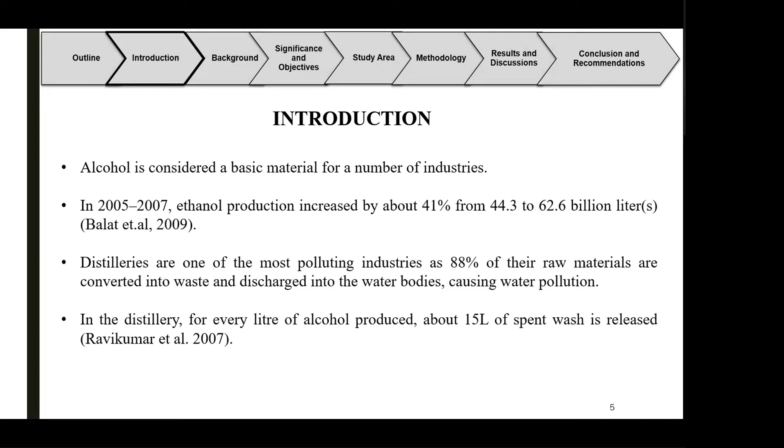Distilleries are considered one of the most polluting industries, as 88% of the raw materials are converted into waste and discharged into the water bodies, causing water pollution. In the distillery, for every liter of alcohol produced, about 15 liters of spent wash is released. So you can imagine how much wastewater is being produced.

Just a little background: currently, alcohol production is based on the use of non-waste agriculture substrates such as cereals, potato starch, etc. On a global scale, about 47% of ethanol is produced from sugary raw materials.

There are 4 stages of alcohol production in distilleries. The first is feed, where the ethanol production raw materials containing nitrogen and phosphate supplements are used. Then comes fermentation, in which yeast is used, for example Saccharomyces, which converts the carbohydrates into alcohol and then settles as sludge at the end of the process. The mass after fermentation contains 8 to 10% ethanol.

Then in the distillation column, the alcohol is separated as the top product, and the bottom product is a brownish liquid known as distillery stillage. Then comes finally the packaging and deliveries to the clients. Currently, in some countries, byproducts from the distillery industry are used for direct soil fertilization due to their high content in nitrogen, phosphorus, and organics.

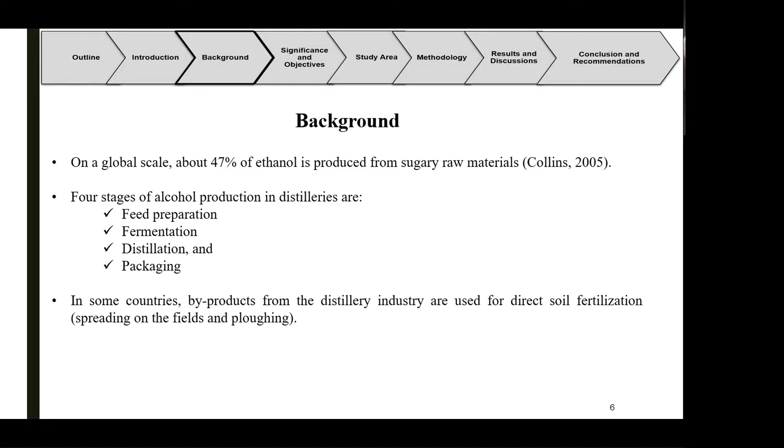Is it moving? I think it's stuck. Yeah, we see the same slide.

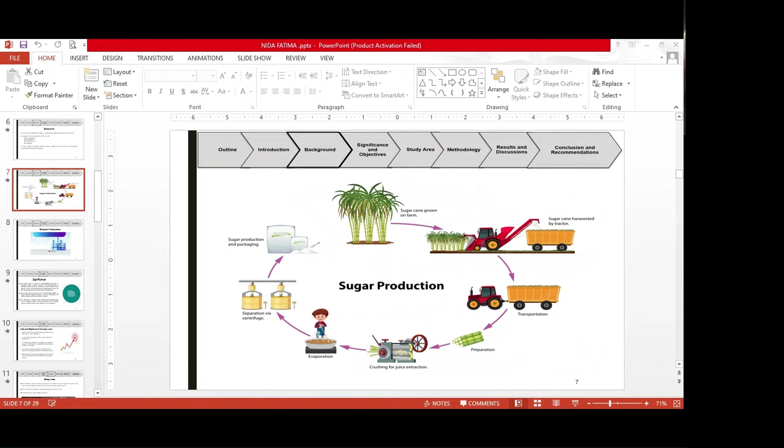Okay, sugar production. This is the general view of sugar production, how sugar is produced. Sugar cane from the field is harvested and transported to the sugar mill, where it is crushed for sugar cane juice extraction, evaporated in a large pan, and then separated via centrifugal machines. The final product is then packaged and delivered.

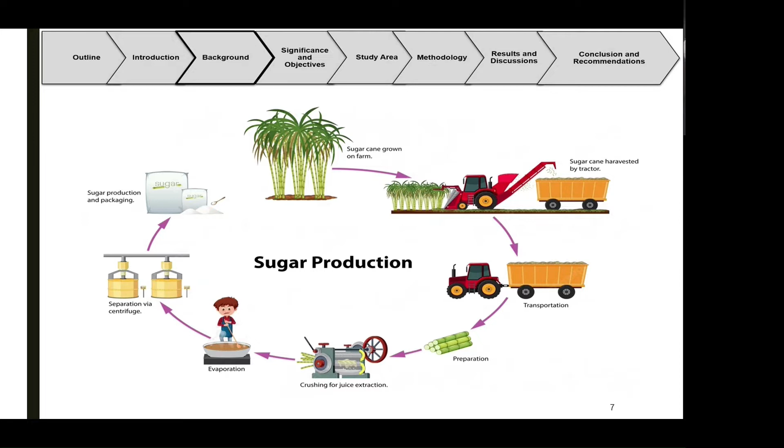Now let's see in the short video how ethanol is being produced in the current study area.

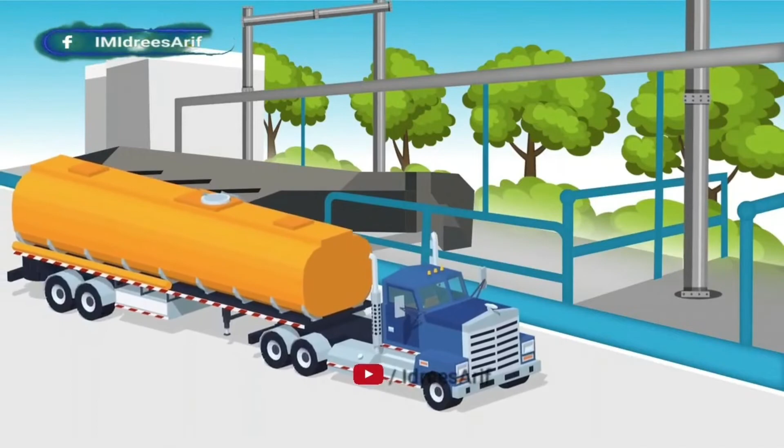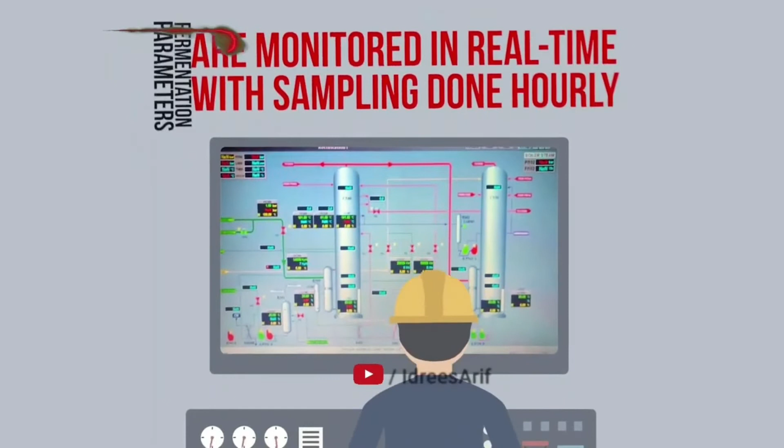We have always made quality our number one priority. We have in-house labs at all of our plants that meet international safety and quality standards. Our quality control process begins at the raw materials stage, where we have fully covered molasses tanks for our in-house feedstock, which happens to be the largest amount of captive distillery feedstock in Pakistan. When we buy feedstock externally, we test prior to purchase, individually monitor each shipment, and have an imported seal technology to prevent tampering. During the fermentation process, fermentation parameters are monitored in real time with sampling done hourly. We also import our yeast from the United States to ensure high yields and purity of our product.

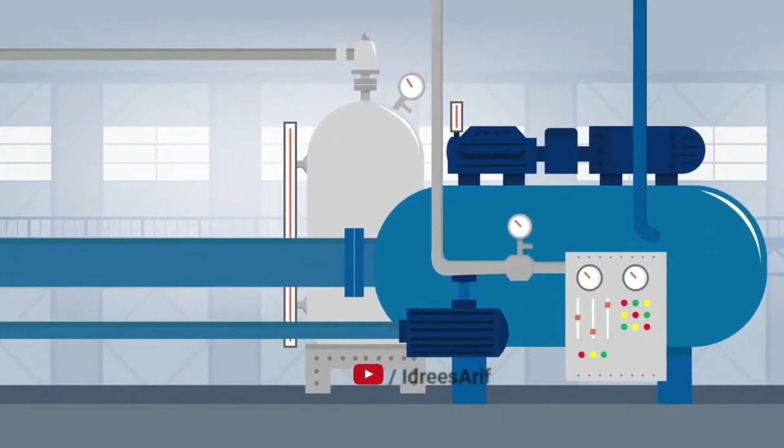Once the product enters the distillation process, we collect samples every 30 minutes to ensure moisture percentages are tightly controlled and impurities are kept to a bare minimum. The odor and appearance of the ethanol is also closely monitored. After the distillation process, the ethanol reaches an intermediate tank where it is immediately sampled and tested to make sure it meets our strict quality standards.

Before the intermediate tank is emptied, the ethanol is tested again. Once in general storage, the ethanol is sampled and tested daily to ensure it maintains the properties and quality it had upon entering the storage tanks. Finally, prior to loading from our distillery's storage tanks, the ethanol being sold is sampled and tested again to ensure there is no variation in quality parameters.

Okay, now you have already seen what happens in this industry. It's a general process as occurred in every distillery and sugar mill. Now let's move on towards the significance of the study that I have done.

Then you can see that from air pollution, asthma and other diseases are attacking people living near the vicinity of these areas. Also, increased transportation is causing a major threat to wildlife in the area, and wildlife is suffering from habitat loss due to frequent disappearing of forests only for the sake of industrialization.

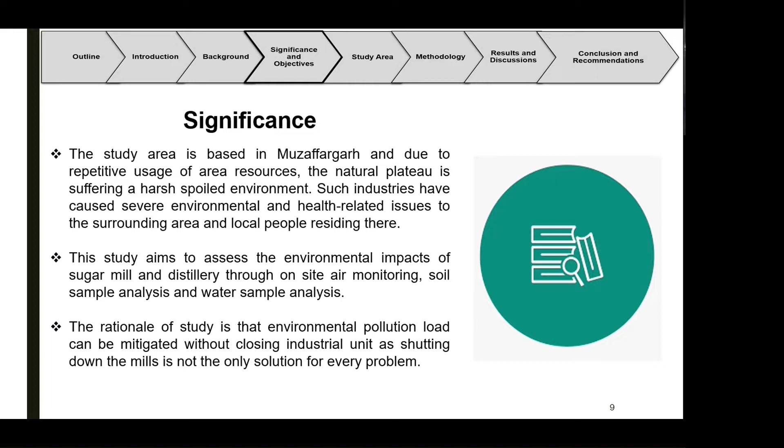So this study aims to assess the environmental impacts of such industries through air monitoring on-site, soil sample analysis, and water sample analysis. The rationale of the study is that the environmental pollution load can be mitigated without closing industrial units, as shutting down the mills is not the only solution for every problem.

These were the aims and objectives of the study: monitoring various environmental quality parameters of air, water, and soil; to inspect the wastewater pollution load in sugar mills; to evaluate the pollutant concentration in air; assessing environmental impacts of sugar mills; and then suggesting feasible and environmentally friendly actions to resolve and mitigate adverse health and environmental impacts.

This is the study area. This industry comprises three sugar mills, two ethanol distilleries, and a carbon dioxide plant. They have two main labs staffed by multiple professional chemists and biologists. The distillation columns are made from high-grade stainless steel, which prevents corrosion and thereby protects the ethanol from impurities.

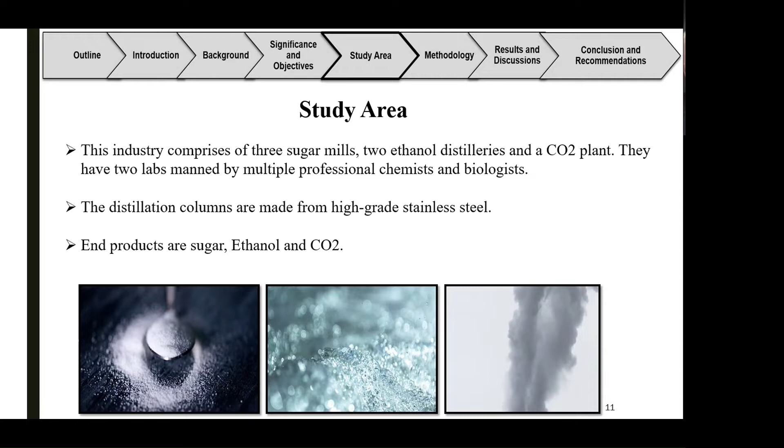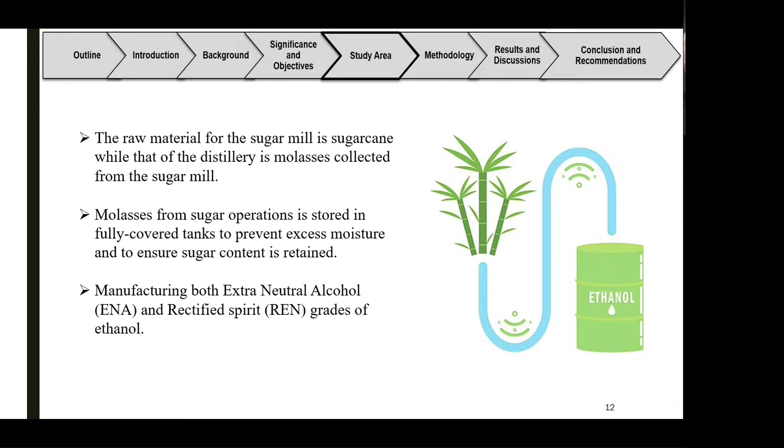End products produced were sugar, ethanol, and carbon dioxide. The raw material for the sugar mill was sugarcane, while that for the distillery industry was molasses collected from the respective sugar mill. Molasses from sugar operations is stored in fully covered tanks to prevent excess moisture loss and to ensure sugar content is retained. This industry manufactures both extra neutral alcohol (ENA) and rectified spirit (REN) grades of ethanol.

So this is the aerial view of the study area, where a road named Shah Jamal was the main road touching the project site location. There was a stream running nearby used for draining effluents from the mill, and about 500 meters away there was a residential area.

This was the pond or collective tank you can see here, that was used to discharge the wastewater or to collect the wastewater in there, and from there the processed water was discharged into the nearby stream slowly so that the pollution load in the water body having that wastewater could be controlled at a time.

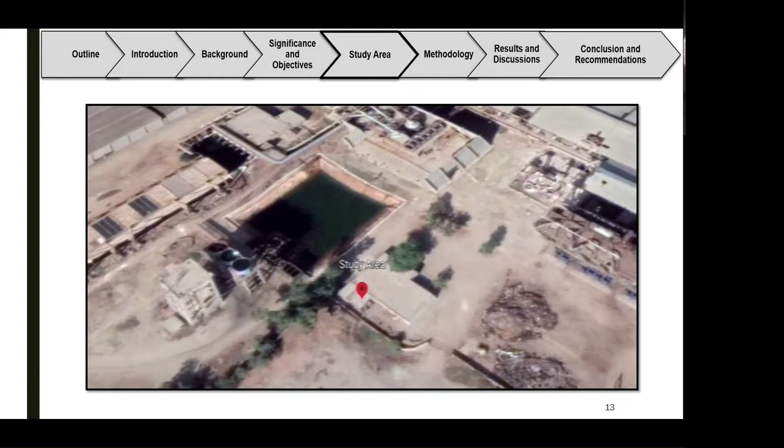Let's see what methodologies were adopted during the whole assessment. This is a general or universal method that can be used for conducting environmental monitoring and impact assessment of any industry in the world. First of all, secondary data was collected through a complete literature survey and comprehensive information regarding the sugar and distillery industry and its adverse impacts on the surrounding environment. The baseline study of the research area was carried out and impacts were noted down as well.

Then primary data was collected through a reconnaissance survey. A thorough site visit was conducted in which various samples were gathered and relevant checklists were filed respectively. In the present study, we researched essential environmental quality parameters like water, soil, air, and noise. Noise and air pollution were monitored on-site through various instruments, while water and soil samples were taken and later analyzed in the lab.

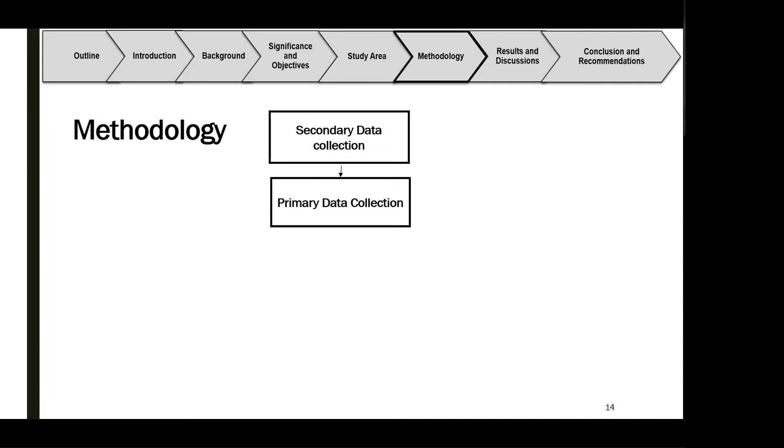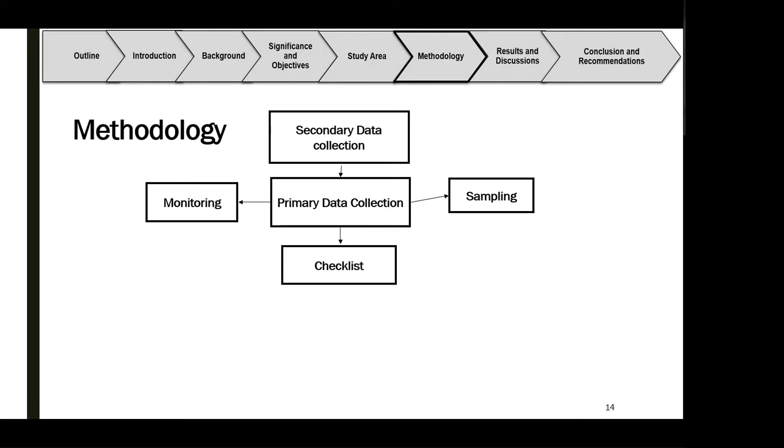In primary data collection, we have sampling, checklists, and monitoring. In the checklist section, for assessing the social impact of industry, general public interviews were recorded on a form, and a checklist was filed to estimate whether local people are accepting the industrial working areas or not. In the sampling section, we collected samples of wastewater, groundwater, and soil.

All samples were collected adopting proper standard methods for examination of water and wastewater by APHA USA. Samples from the canal were collected where water was well mixed, homogenized and flowing, whereas grab sampling was used for process and wastewater sampling. For groundwater sampling, we collected samples at a depth of 200 feet at the project site.

Values for TDS, chloride, pH, sodium, turbidity and other elements shown in the slide were analyzed. Similarly, other parameters such as pH, sulfate, chloride, fluoride, etc. were analyzed by taking soil samples from the study area.

For the monitoring section, we have noise monitoring and air monitoring. Ambient atmospheric quality parameters like nitrogen oxides, carbon monoxide, sulfur dioxide, carbon dioxide, ozone, and PM10 were monitored at various points, as shown in the results section later. Noise level monitoring was done in decibels at 3 points: start, mid, and end of the project site.

On-site monitoring operators and sampling materials were required for the site survey and monitoring. A HAZ scanner was used for measuring atmospheric gases, while a digital sound level meter was used for measuring noise level at the project site. For water and soil samples, various laboratory instruments were used, such as titration assembly, atomic absorption spectrophotometer, and flame photometer, for analyzing various elements in the soil and water body. For reference methods of each parameter, you can check my thesis in detail. Finally, the data was analyzed and results were interpreted accordingly.

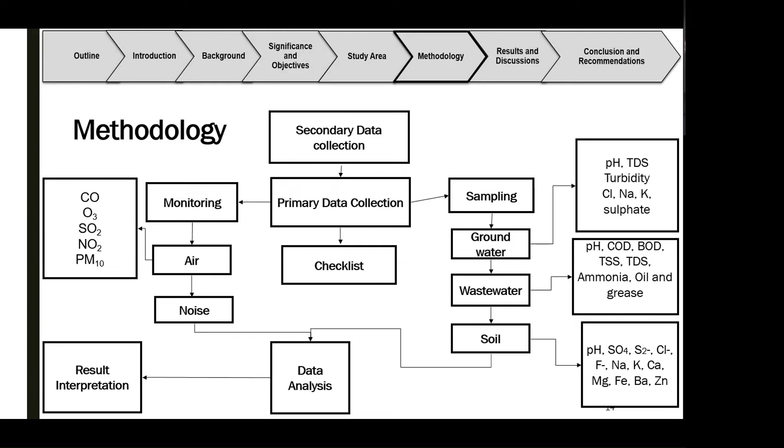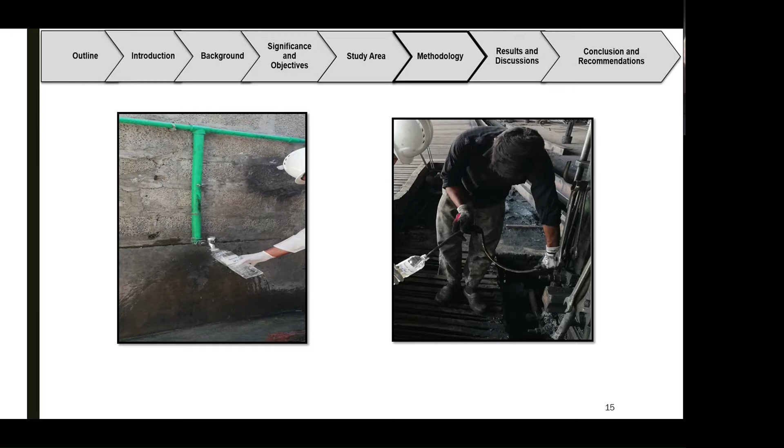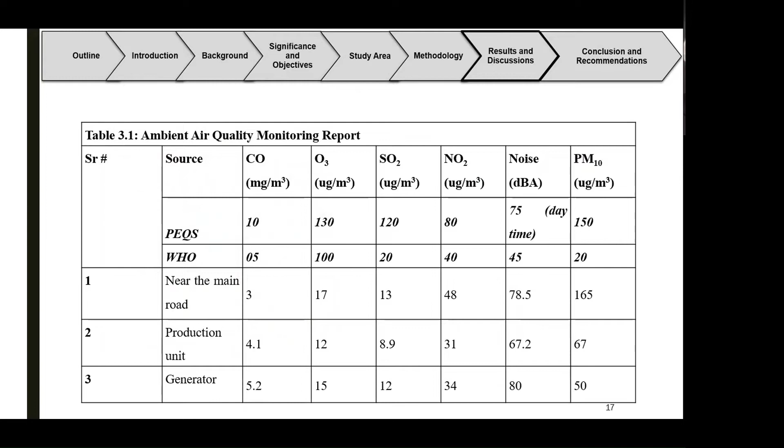This table shows the concentration of various air pollutants monitored at the project site. This graph compares the concentrations of air pollutants at 3 different points of the project site. It shows that pollutant concentration is higher at the production unit, while interchangeably lower at the generator site and near the main road, except for nitrogen dioxide.

It also shows that concentrations of carbon monoxide, ozone, sulfur dioxide, and nitrogen dioxide are below PEQs, while noise and PM10 are higher than PEQs near the main road and generator site. PEQ stands for Pakistan Environmental Quality Standards, also called NEQS, National Environmental Quality Standards. These are standards set by the government for industries regarding allowed air pollutant or noise levels for a specific period of time.

However, in the case of WHO, World Health Organization standards, levels of sulfur dioxide and ozone are below standard, but concentrations are higher for carbon monoxide, nitrogen dioxide, noise, and PM10. If you're not familiar with PM10, PM stands for particulate matter—hazardous, inhalable, inorganic or organic particles that remain suspended in the atmosphere and cause significant environmental issues. They can be of different sizes, but the most hazardous are thought to be PM2.5 and PM10, where 10 means size equal to or smaller than 10 micrometers.

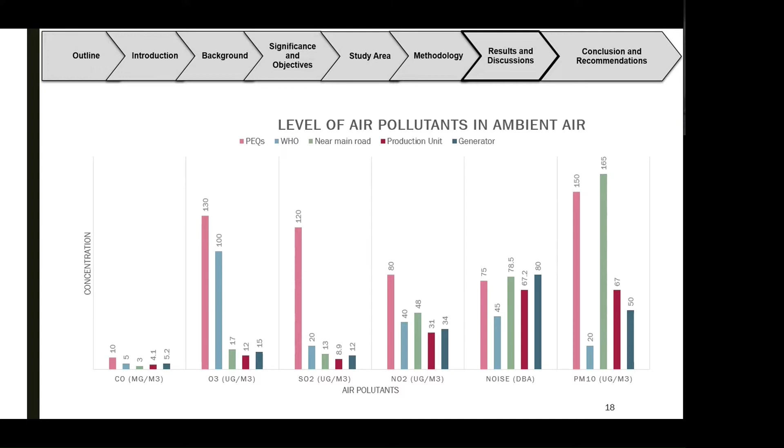This table shows the chemical analysis report of a soil sample. Various mineral concentrations were analyzed and arranged in tabular form, and the figure shows the graphical representation of the soil sample composition with different minerals and their concentrations. Among anions, sulfate and chloride have the highest concentration, while among cations, calcium and sodium are rich in concentration. The remaining mineral components were found in the least amount, and none of the heavy metals were detected in high concentration.

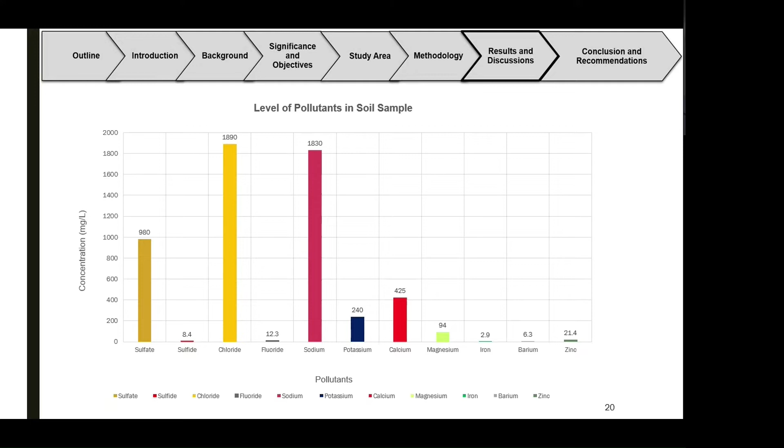This table shows the chemical analysis report of groundwater at a depth of 200 feet, and the figure compares the different concentrations of groundwater pollutants. It shows that concentrations of pH, TDS, chloride, and sodium are the highest among other pollutants and also exceed the set limits of PEQs or WHO standards.

Dissolved salts are the main reason behind high TDS content, total dissolved solids. However, turbidity is within the allowable limit of PEQs. Turbidity is considered the second key parameter for testing whether water is polluted or not.

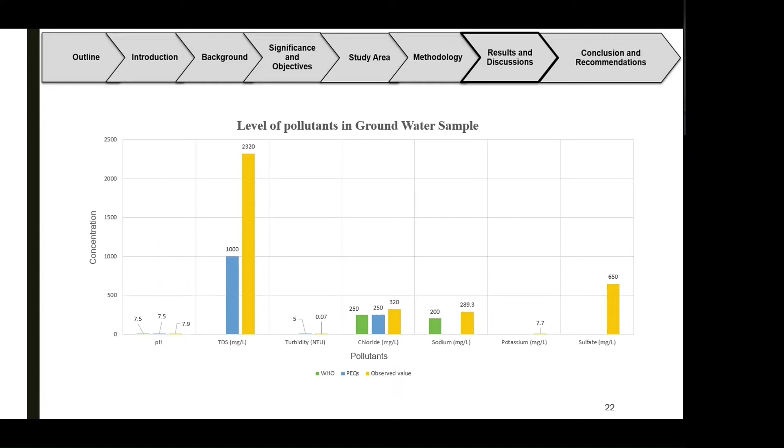Turbid water is not necessarily hazardous. Some minor treatment technology may improve water quality, including sedimentation or coagulation, flocculation techniques, etc. Moreover, potassium and sulfate were also detected during the analysis.

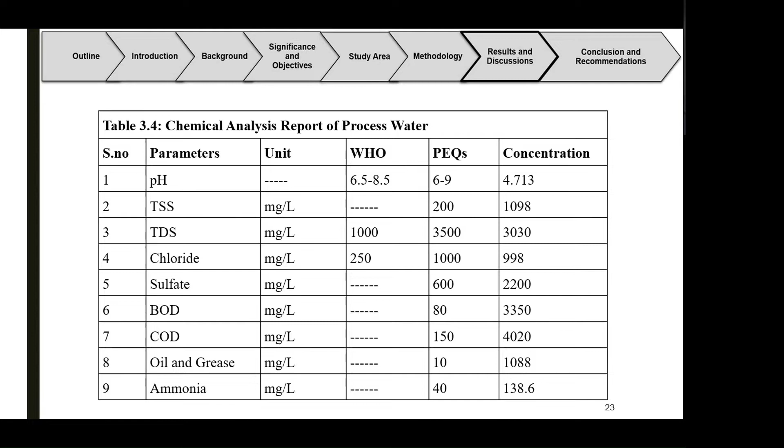Now comes our last chemical analysis report, that of processed water, and its figure shows the comparison among different concentrations of processed water pollutants at the project site. It describes that the concentration of every variable observed in the processed water is above the permissible limit.

As it is processed water or wastewater, you can see that while chloride concentration is above WHO standards, it is just touching the borderline of PEQs standards.

For people who don't know the terms COD and BOD, COD stands for chemical oxygen demand, while BOD stands for biological oxygen demand. Both mean the measure of the amount of oxygen required to oxidize a particular amount of organic matter in wastewater, using a strong oxidizing agent for COD.

But in BOD, we use aerobic microorganisms during the course of 5 days. So in COD we use a chemical agent, while in BOD we use microorganisms.

The graphical representation in the figure shows that COD value is greater than BOD in the processed water. This is because COD is the most accurate method for measuring the concentration of organic matter in wastewater, as a strong oxidizing agent is used. That's why you will observe COD values will always be higher than BOD.

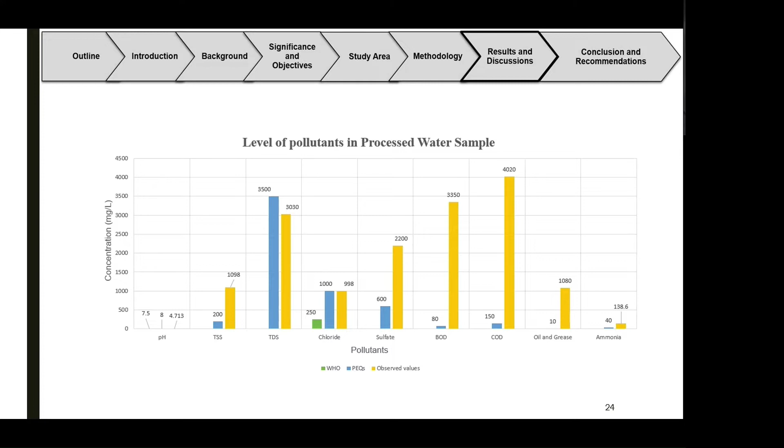Conclusion: on the basis of the given evaluations and analysis report, it is concluded that the current sugar mill and distillery can continue operating under controlled circumstances and mitigation measures.

However, further steps should be taken to mitigate potential hazards in the already stressed environment and pollutants. Concentration of pollutants should be lowered to the already set respective standard values, so that without shutting down the industries, the environment could be saved and the country's economy could progress simultaneously.

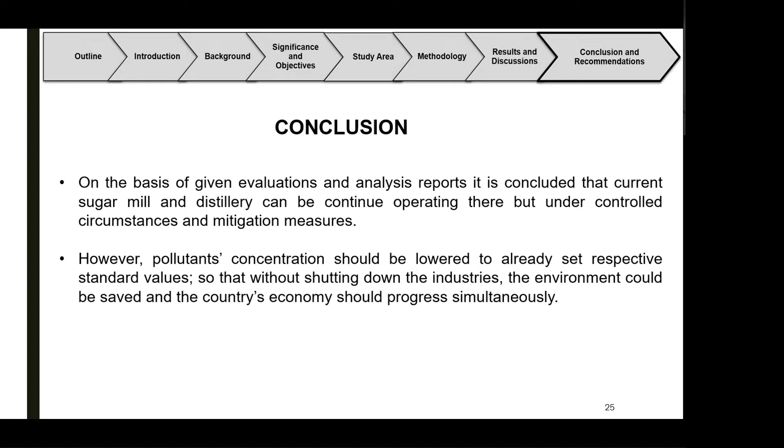The present study also concluded that distillery industries use a huge amount of water, various types of chemicals and raw materials in the production of alcohol, which generates high-strength wastewater. Due to very high BOD and COD, this wastewater is considered an environmental hazard for both the water body as well as soil.

As the water seeps through the soil, you can imagine it will enter into the groundwater that we will drink later on.

Thus, there is an urgent need to address the limitations in the existing methods and develop integrated treatment processes that provide a complete solution to the treatment of distillery wastewater.

Immediate actions and specific policies will be required to minimize the different sources of pollutants over time. Moreover, there is a need to develop specific EIA, environmental impact assessment, and environmental monitoring guidelines.

As the unmonitored running of such industries is causing severe damage to our atmosphere, as can be seen from all the above analysis, monitoring reports, both on-site and laboratory, and issues explained by the local communities.

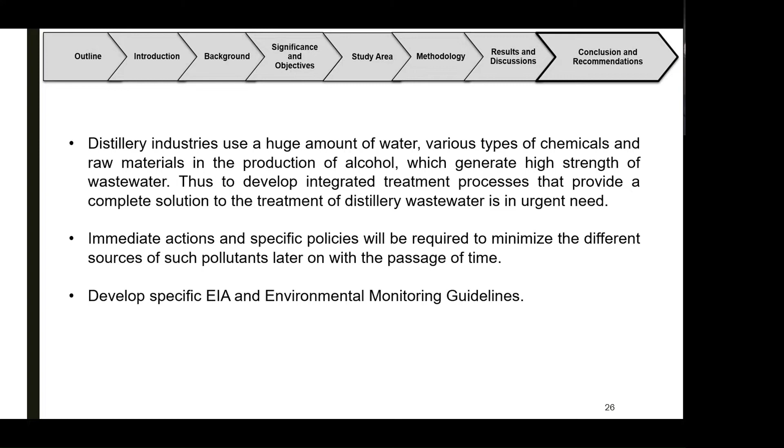Thus, installing a new plant in such a scenario and environmentally disturbed area is both socially unacceptable and environmentally not feasible. Based on current studies, some recommendations are given for the operation of sugar mill and distillery in proposed areas, so as to lessen or minimize potential negative impacts.

First, consideration of potential air emissions and appropriate control measures like dust control measures for PM10, and periodic monitoring of emissions. Second, waste heat recovery technology should be introduced in the plant to save the country's energy resources.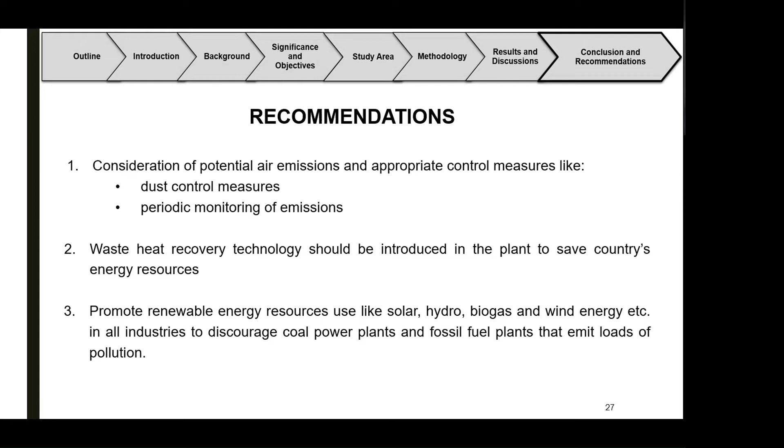Third, promote renewable energy resources like solar, hydro, biogas, and wind energy, etc., in all industries to discourage coal power plants and fossil fuel plants that emit lots of pollution, thus growing sustainably in the industrial sector and promoting a green economy. Fourth, as we know Pakistan is currently facing water shortage problems, industries should use water consciously.

And must follow water conservation practices. Fifth, workers must wear PPEs. PPE stands for personal protective equipment like helmets, etc., while working in any industry where the probability of hazard is maximum.

Sixth, regular internal and external audits should be carried out by responsible authorities. And lastly, it is recommended to discharge sugar mill and distillery effluent, or any industry's effluent, during heavy flow of rain, which in Pakistan ranges from July to August.

So I have written this range here; you can adjust it according to your region. This way, the receiving water body would receive a diluted form of wastewater with minimum negative impacts.

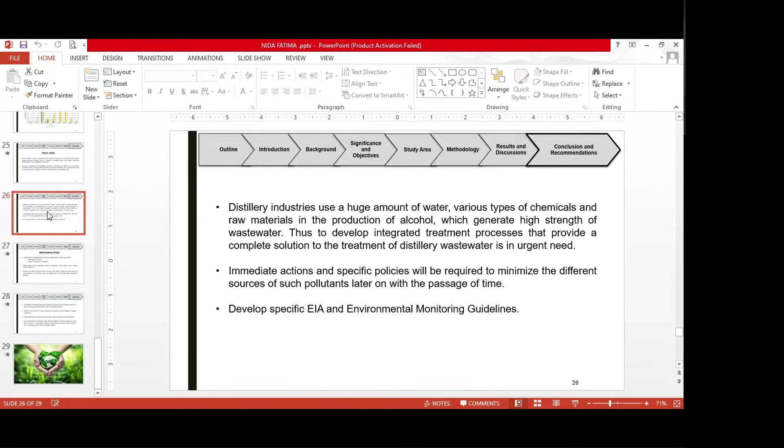Before we do that, the last point that you raised in your presentation referred to these climate problems that we have heard in Pakistan. How is the situation now in your area, and how much affected was the area of the distillery that you are analyzing? The distillery during the process of my thesis work over there, I analyzed much suffocation in the air.

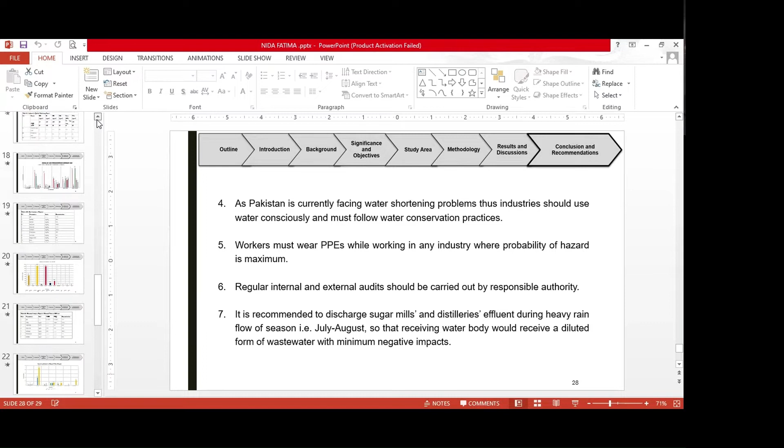Air pollution was a lot. I have shown in my presentation, you have seen already that there were a huge amount of pollutants emitting from the industry.

I was referring to the exceptional rain seasons that have affected Pakistan. Yeah, this is due to the fact that many industries are emitting pollutants and they are gathering in the environment, and due to that the raining season or the climate has changed so much.

If you ask me, in that region it seems to be much colder in October season, but now it's too much hot over here. So there is a climate change and that is impacting the raining season as well, but mostly the raining season starts from July to August here in Pakistan, all over Pakistan. It's not being affected that much.

So industries are allowed, or they are permitted, to discharge their wastewater during that season so that the pollution load in the streams or canals or rivers can be controlled.

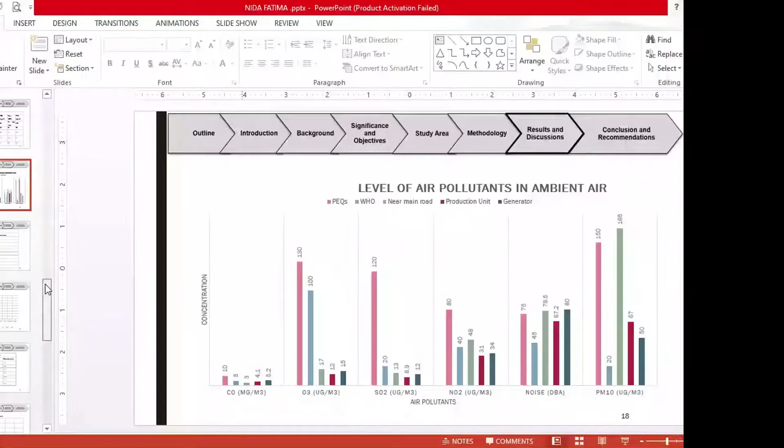I mentioned in my presentation already, in the methodology section, this is the general methodology that I followed. Maybe you have seen that. I first did a secondary survey, collecting data regarding the issue or the site I'm going to study. Then I collected primary data through sampling, checklist, and monitoring. For sampling I listed the parameters, and for monitoring as well. For checklist, we went through a list of checklists that I have attached with my thesis in the appendices, to see what people think. Then after gaining the results from groundwater, wastewater, soil, and air, we analyzed the data and the results were interpreted as shown in the graph.

So yes, this is a general methodology. You can use it everywhere, in any industry, not only the sugar mill or distillery. This is the general approach.

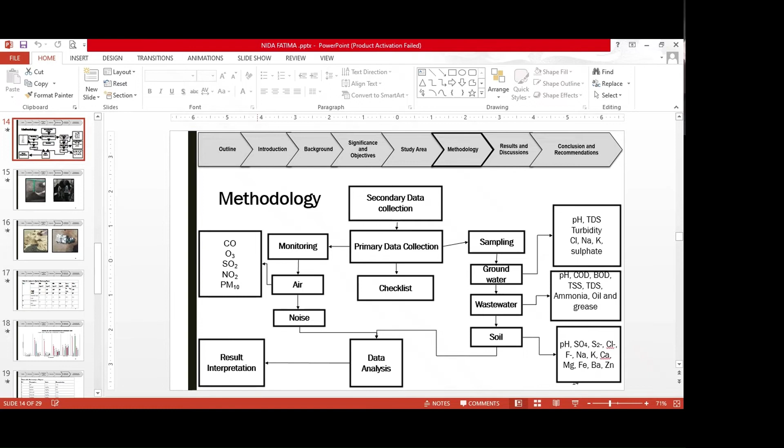So can you get their data behind their backs, or with them not knowing?

No, no, it's not possible to get the data behind their backs because I was an internee, not a worker there. And an internee has a boss with them every time they move. So I gathered the data - I have a friend over there, so I gathered the data with them, using their instruments and tools. I don't have a Haz-Scanner, it's a big tool, you can check it out, I can't afford that. So the Haz-Scanner, digital sound level meters, every tool and every laboratory - even the labs were used by them. So I just gathered the data from their files.

I asked permission from them: can I use your data in my thesis? I told them I will not let their name be exposed. That's what I did. They know I have their data and that I've already used it in my thesis. That's why they allowed me to use it, but not to use their name.